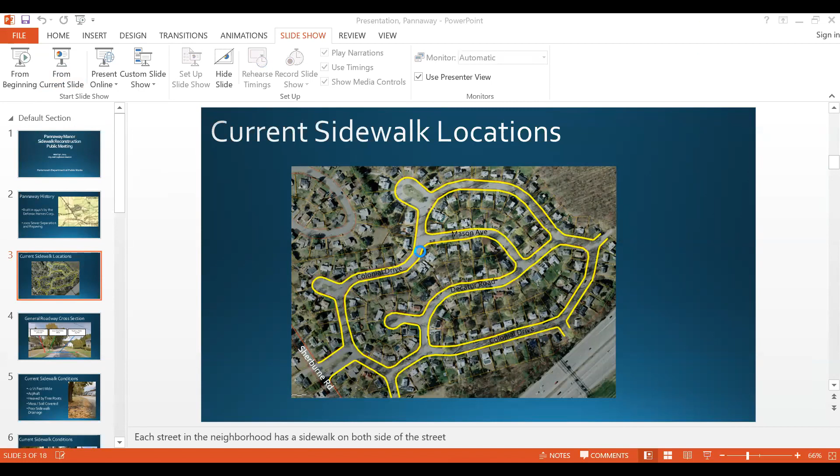Okay, as we were saying earlier, sorry for the delay. The current sidewalk locations in Pannaway Manor are shown with these yellow lines that indicate where the present sidewalks are. As you can see, every street in Pannaway currently has a sidewalk on both sides of the street.

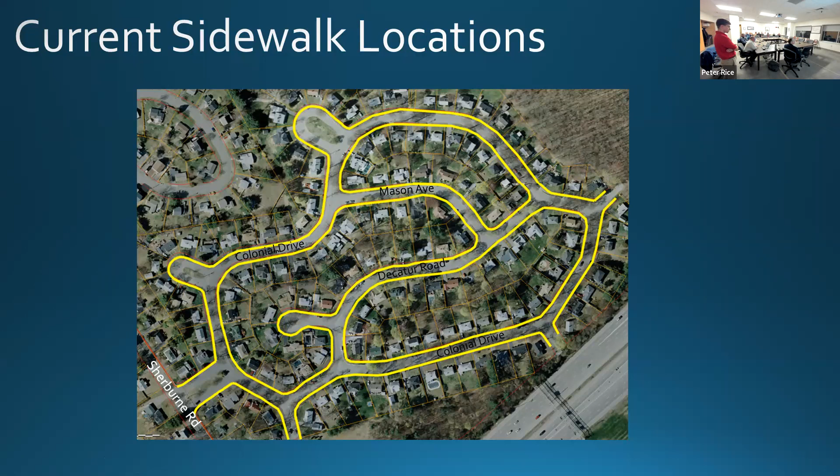So this is just a general roadway cross section of a typical road in Pannaway. This happens to be Colonial. These numbers are approximate, they vary slightly throughout the neighborhood. However, typically in Pannaway there's about a 2.5 foot sidewalk, followed by approximately 8 feet of grass strip, followed by about 24 feet of roadway. And that is mirrored on the other side of the road with the grass strip and the sidewalk.

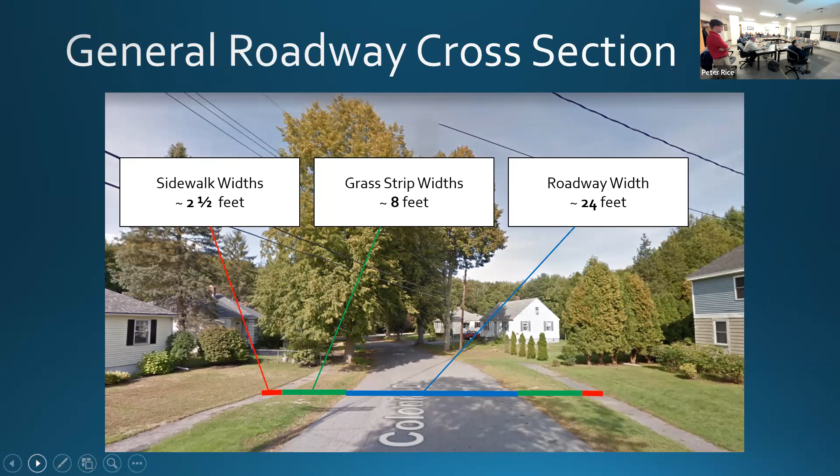So our current sidewalk conditions, as I just mentioned, they are approximately 2.5 feet wide. They are asphalt. They have been heavily heaved by tree roots over the past 80 or so years. They are heavily moss and soil covered in select areas. And there was also poor sidewalk drainage throughout the neighborhood due to the natural settlement of the sidewalk over time, as well as the gradual buildup of yards.

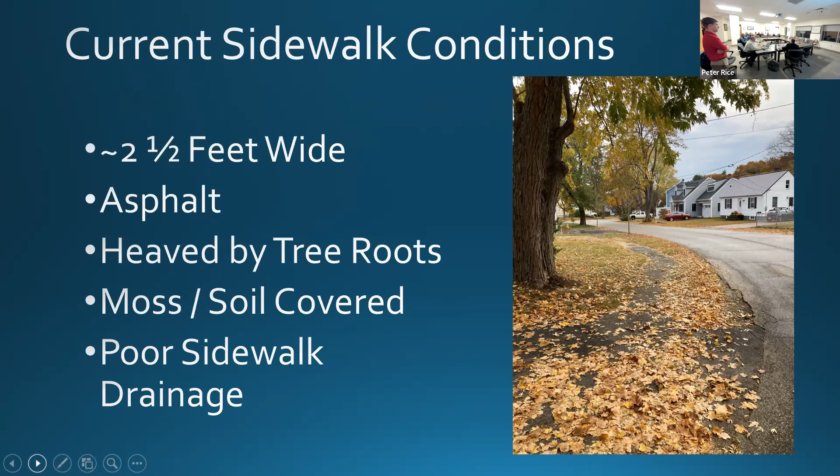So this is just some photos of current sidewalk conditions that show the heaving of the roots of the asphalt. This is pretty typical of any real snapshot in Pannaway.

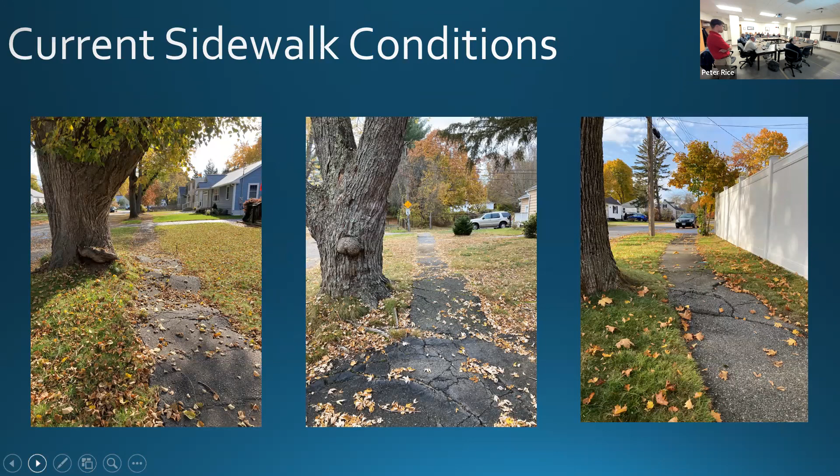So in December of 2021 and January of 2022, we initiated a survey among area residents. We passed out 150 surveys and we got back over 50 responses. So a third of you responded, which is pretty good in our book. The majority obviously confirmed that the sidewalks are in poor condition and that the poor condition of the sidewalk impacts residents' usage of said sidewalks. Additionally, 90% of respondents favored improved sidewalks.

Ooh, that's beautiful. So our proposed upgrades, as you can see, 5.5 foot wide concrete sidewalks. These are Americans with Disabilities Act or ADA compliant, as well as they match the current city standards for modern sidewalks.

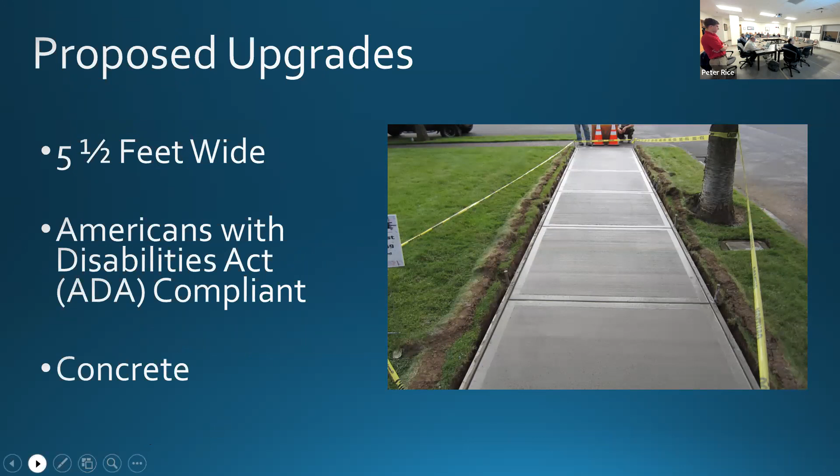So there were some considerations that we had to take when we were determining the locations where we would put these sidewalks. First and foremost, we wanted to impact the fewest amount of trees as possible to try to retain the tree-lined nature of the neighborhood as it currently exists. We also wanted to maximize the amount of houses that would receive replaced sidewalks. We also wanted to improve walkability throughout this entire neighborhood. And we were also constrained with our available funding. So we found it necessary to break this project into 2 distinct phases.

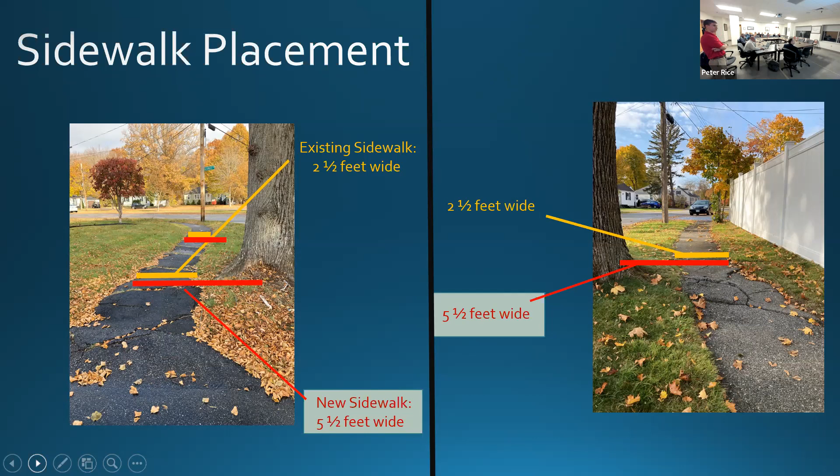Instead, we will be extending the extra width of the sidewalks into that green strip that separates the sidewalks from the roadway. As you can see at this far back one, some of the time that will not be an issue as it currently just exists as grass. However, there will be some tree conflicts, as you can see right here. Next slide, please. Tree impacts.

Unfortunately, that is going to be a necessary reality of this project. As you can see, we are more than doubling the width of the existing sidewalk. On the left side, that is a tree that would likely necessitate removal, as doubling the sidewalk would put the edge of the sidewalk into the main trunk area of the tree. Over here on the right, we can see a tree that we may be able to avoid removal completely, as there is still some space between the existing sidewalk and that tree.

Excuse me, that's still ADA compliant? That is a very good question. It is, yes. You're allowed to narrow a sidewalk for a shortened period of time.

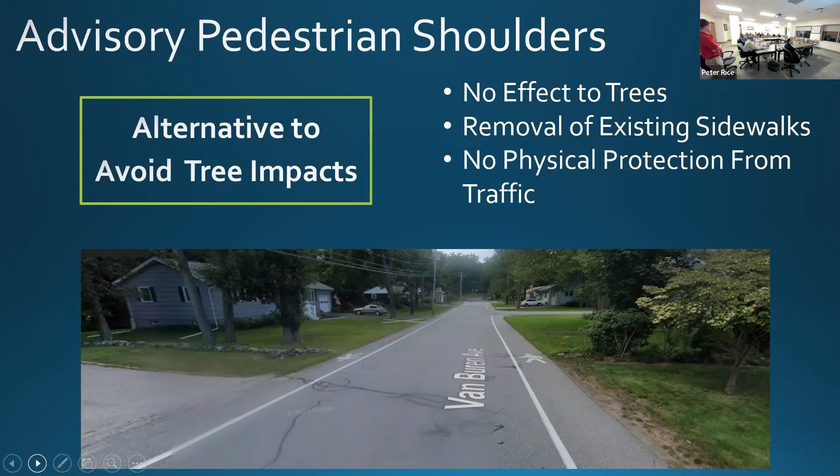So while we were going through this, we did feel it necessary to present another alternative that would avoid tree impacts. These are called advisory pedestrian shoulders, and these ones are installed on Van Buren over in Elwyn Park. The benefit of these is they have no effect to the trees at all, as they exist on the existing roadway. This would involve the removal of the existing sidewalks and the painting of these pedestrian corridors that you can see. Obviously, we understand that this is no true replacement for a dedicated sidewalk, as it offers no physical protection from traffic. However, we did think that it was important to include at least one alternative that would greatly reduce the amount of trees that would be affected by this project.

So some next steps. We are currently in the public input step. That's why you're all here. Using input from this meeting, we will be completing our preliminary design and moving towards a more concrete number of trees that will be affected. We will be going to the Tree and Greenery Committee, and we're seeking their input on this project. We will then be finalizing design, advertising, and opening for bids in spring of this year. Our anticipated phase 1 construction is in summer and fall of this year, barring any unforeseen delays.

At this time, I would like to hand it over to my colleagues to add in anything that I may have forgotten, and then we'll open it up to public comment. Thank you.

Hi, good evening. So that's our first cut on what we are expecting this to look like. I did do a drive-by kind of preliminary assessment in your neighborhood today. And my preliminary count was if we went for option A, which is the preferred alternative, I think most likely 29 trees are going to get impacted. Not the 39. There were 39 orange X's on that plan.

I was just in Europe, I went to the UK, and I was amazed how much public transportation there is. It really is a shame we're not taking advantage of it here.

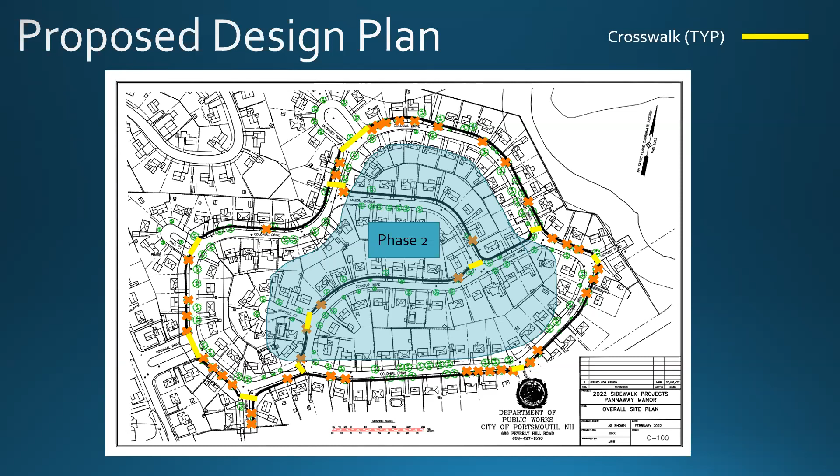I agree. Okay, we have a question from Abigail. Tyler, would you mind switching back to the slide that shows where the sidewalk is going to be - the yellow loop on the map? Thanks.

Abigail, can you hear us? Yes, go ahead. My question is kind of indirect related to the sidewalks. I have a neighbor who is very rude and always parks directly behind my driveway. Is there any way when you put the new sidewalks in that you can also put up a no parking sign on the other side of the street by my house, in front of 234? I'm not trying to be funny - this is a real problem, and it's been a problem with the last four people who have lived in that house. They're always on the street and it's very narrow, so we can't back our cars out safely.

So that's something we've brought up to the city a couple of times - we've always gotten laughed out like you just did, but it's really a problem. Is there a way to put a sign out when you put in the new sidewalks? Abigail, we'll get in touch with you separately to see what kind of solution there is. No parking requests go through parking, traffic and safety. This is becoming a safety problem, that's why I'm bringing it up.

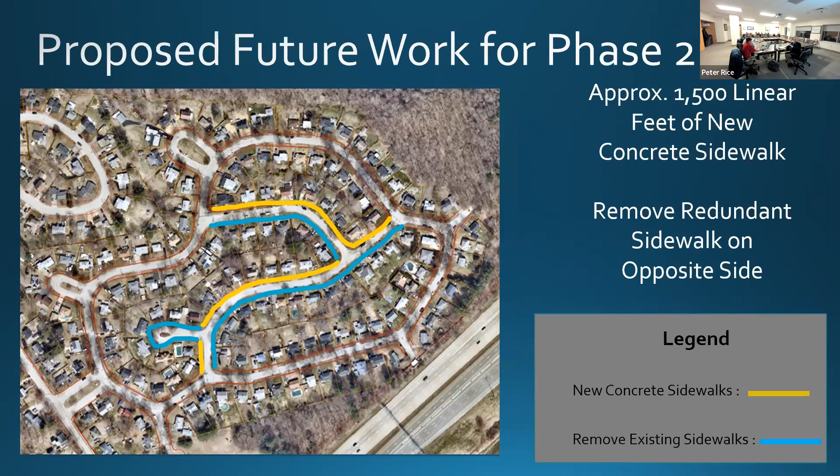Okay, that's pretty good. So, just as we're nearing the end, I want to thank the city, because we kind of sometimes feel a little left out since Everett retired - he was our reporter for so many years. Just the other day there was an issue, not too close of a call, but a couple of kids riding bikes and a FedEx truck - it was a little too close for comfort. We have some of these kids that are of the age where they can ride their bikes around the neighborhood. It's a safe neighborhood - I'm sure I'm not supposed to say that, but it is.

I'm really just thankful for the amount of young children we have now. My daughter will tell you 18 years ago she was the only child in the neighborhood - that wasn't really true, but there are a lot of kids at that age now, out being able to gather together. You see it here and there, some cars that come through at a really rapid pace - that's a whole separate issue, that's police, I get it. But just having the thought of getting these kids that are out there riding bikes and walking together, that they can have a nice ride, because nobody uses the path right now.